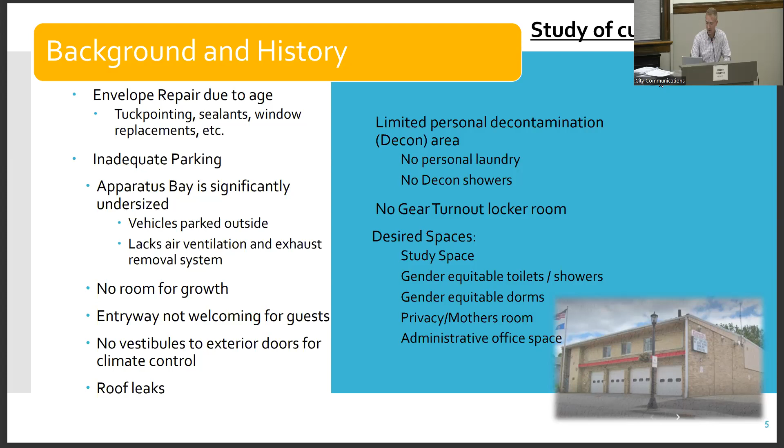We also identified that we'd like to see different spaces - if it would be optimal to have a study space, gender equitable toilets and showers, gender equitable dorms, privacy mother rooms, as well as administrative spaces. In that study, we also identified non-compliance with different codes, ADA compliance, as well as identifying that we do have asbestos.

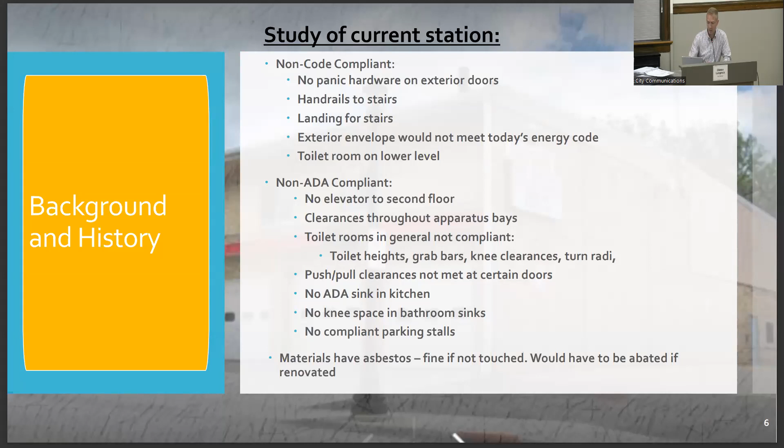In the places that it's at, it's fine if we don't touch it, but of course, if we do any renovations or maneuvering around it, then we have to have an abatement plan in place.

Overall, what we assessed on our 60-year-old station is that the positives are that it was in a good location compared to our fire district and where our responses and volunteers were. It has a meeting room, which is nice, as well as museum space. But the negatives came to light with safety, lacking modern safety features and space for best practice - apparatus floor is small, along with cleaning and decon, office space, turnout gear, public entrance and parking, as well as overnight accommodations.

Overall, the study led to a recommendation to begin assessing a possibly new facility. But as we talked about with the location, the study also showed us a mapping of where our volunteer responders are in relationship to the station.

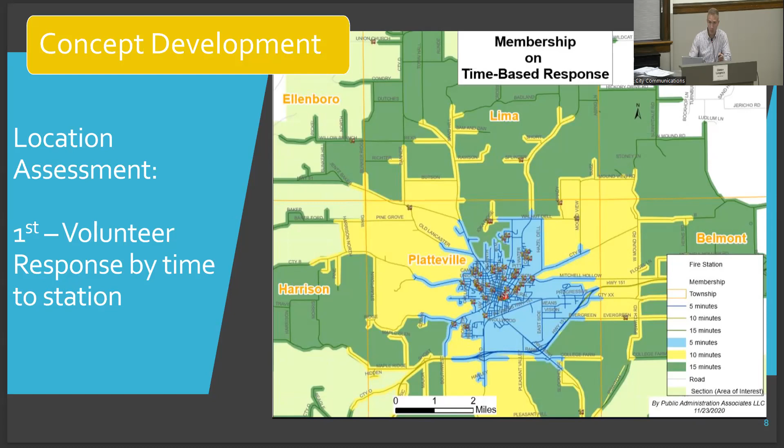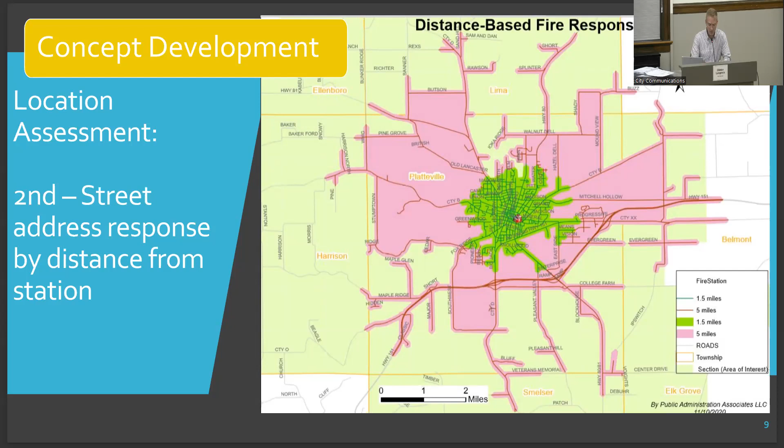Later into the project, we also started to ask the question, as we considered placement of the fire station, where are our responses at? A recent plot graph was put together through our partners, the Southwest Regional Planning Commission, who does our GIS work. The Chief sent them the addresses of our responses in 2022 to put on an overlay map.

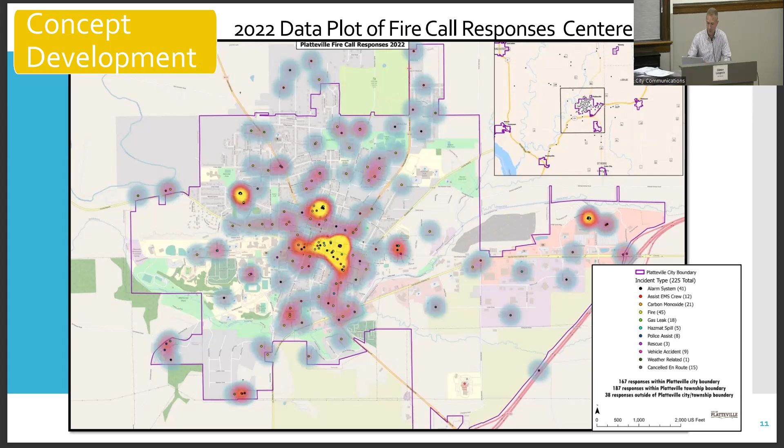With this data and the availability of space the city had at the time, we evaluated 3 main areas. We evaluated the existing site on East Main and quickly arrived at the conclusion that it's too small—the 6 bays needed for the current apparatus does not fit on the existing parcel.

We then looked at the Armory facility on Water Street, and again arrived at this being too small as well. It would need a 3-story solution, and has challenges with parking as well as stormwater that runs through that area, plus concerns with site safety and where responder parking would have to be in relation to the bays and other elements.

The space between Adams and Lewis Street, the O.E. Gray school site, was also evaluated, and this proved to be the most opportunity out of those 3 sites. It has room for growth, but was also identified as needing to account for some slope, as the contour runs downhill from the front side of Adams to the north side of Lewis.

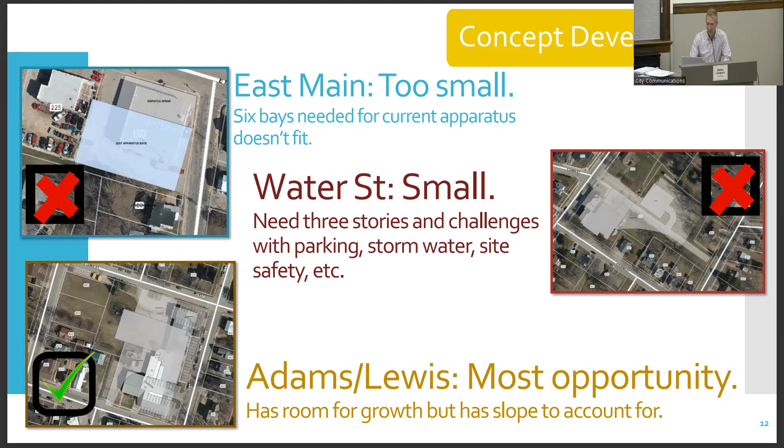With this assessment and data coming back, the city decided to move forward and begin design. We brought in Wendel Five Bugles to kick off the project and follow a timeline that roughly followed this, though it got extended a little bit. That timeline ended up pushing into around April-ish of 2023 in hitting these benchmarks.

While we were evaluating the different opportunities on the O.E. Gray, one of the first opportunities evaluated was a renovation of the existing school there. The concept was to reconfigure it, put a bay on it, and make it a fire station. Through that exercise, we realized the school is not meant to be an emergency response building. There was a lot of space, but not necessarily in the right spots. Using the existing hallway configurations also proved a challenge for operational purposes. The overall assessment was that it would require significant demolition and reconstruction, so essentially starting with an etch-a-sketch on OE Gray was seen as most preferable.

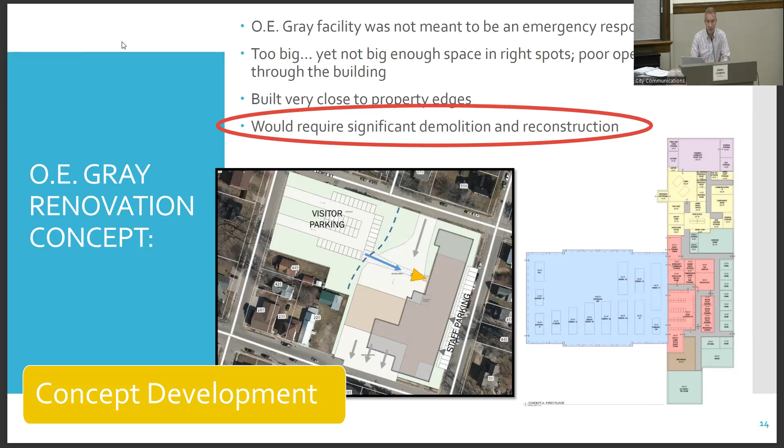Then a series of multiple different models were explored with a two-story design concept. They looked initially at trying to capture some of the topography, having a ground level entrance off of a basement floor, and a ground level entrance off of Adams Street, and looked at different places to position it on the parcel. Multiple models were explored in trying to arrive at a solution on OE Gray.

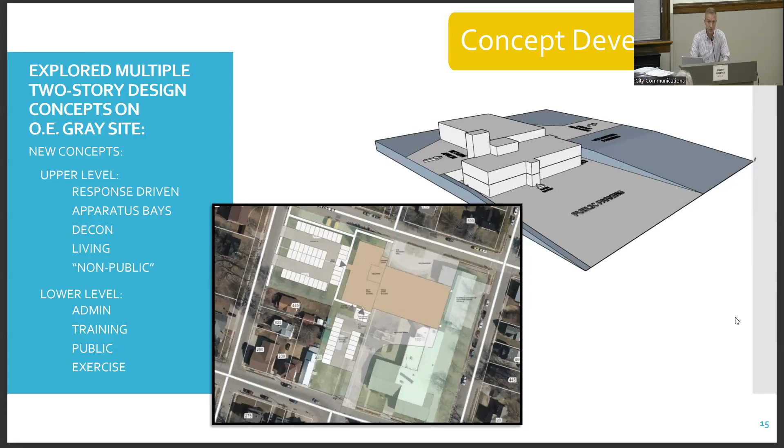At the same time, through the efforts of some amazing folks here at the city, with support from our state and federal legislators and all kinds of folks that helped us, as well as partners in town writing letters of support, we were given notification of an appropriation of federal congressionally directed funds of $7 million.

We also brought in a construction manager, arriving through a bid process through our RFP process, arriving at Kraemer Brothers. In bringing in the construction manager, we had a clearer vision of what some of the civil work was going to be in order to accomplish the project. So we had a clearer understanding of the engineering, as well as some of the material costs and inflation.

At this time, we also became aware of a property line discrepancy as we surveyed the plot. How that impacted things: if you're familiar with the driveway that goes into OE Gray, the fence on the west side is edged over and actually encroaches into the existing parcel, because the original alleyway is only on the east side of what is Highway 81 there. So we became aware of that small change in expectations, if you will.

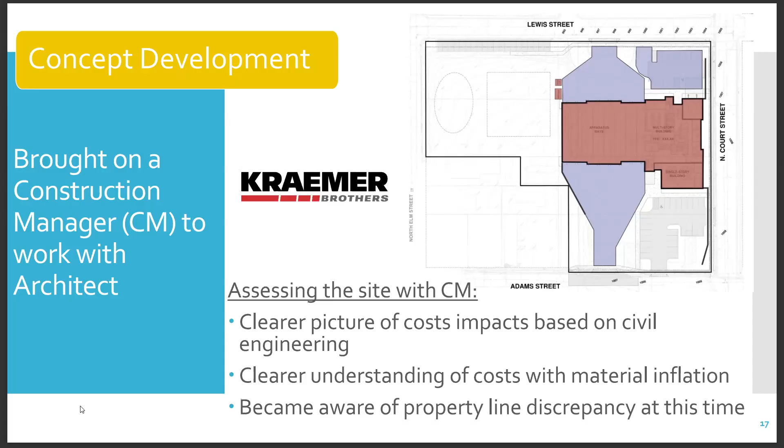As many of you were here on the evening of April 20th, we had our schematic design presentation, or concept design presentation, brought forward from Wendel/Five Bugles, and then also the Kraemer Brothers.

The solution fit on the build site. It offered 7 drive-through bays, decontamination, admin offices, a 60-person training room, storage, kitchen, EOC space, and future expansion for dormitories, essentially a second floor that was shelled. It came at a cost estimated at $15,475,000 based on square footage.

It also had several different features or alternate bids that could be included into it or reduced from it. Taking that design and talking with our folks here on the city end, we asked them to slim down that 2-story schematic to get to a price point down about $3 million, bringing it from $15.4 million down to $12.5 million. That was based on the assumption of knowing we had $7 million in appropriations.

That put an obligation on the city of borrowing approximately $3 million. It put our town's partners in an obligation of borrowing approximately $1 million. And that also left about $1.5 million that, in dealing with our fundraising partners, they felt they could potentially raise with local support.

But in our efforts of doing that, how this was all slimmed down was really based on square footage reductions to fit a price point. So all the different features and functions of those rooms—the gear room, the PPE lockers, watch room, et cetera—were all condensed down again to meet a price point. And there were concerns about how much functionality we'd be losing if we compressed those spaces that small.

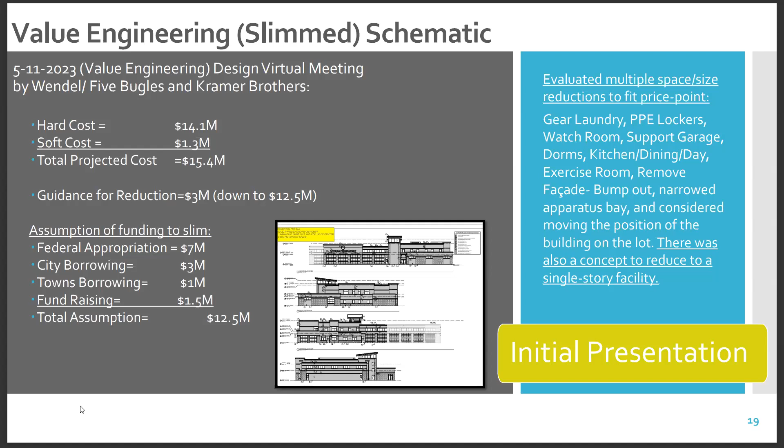At this time, it was also brought up: is there a way to reduce additional costs, to try to save some of those features and room sizes by bringing it down into 1 story? So not quite a backup and restart, but more of, okay, let's try to figure this out then. We arrived at working with our design team on bringing forward 4 main concepts for our different partners to evaluate.

The 4 main concepts are the two-story slim design, which we just addressed in broad strokes, a single-story design that fits on the parcel being OE Gray, a single-story design that fits with the acquisition of the adjacent blighted parcels next to it, like an expanded OE Gray, and then a concept of a single-story design that can be placed out in the industrial park. The thought there is that you'll get a bigger sandbox, with less restrictions and less civil work to engage in, so maybe we get more for our money. We also asked for the alternate of a basement space and a seventh apparatus bay to be featured as options for all four of those basic concept designs.

So in broad strokes, the first option is the two-story slim design that fits on the parcels. On a broad assessment of this parcel, you're looking at improvement of bay space compared to the existing facilities. It fits on the OE Gray site, with an egress onto Adams Street, east of the corner on Highway 81. It doesn't allow for future occupancy without added money, because this design and price point essentially has the second floor shelled and unfinished. So we don't have dormitories for overnight or long stays, or facilitating full-time responders. The multiple stories also include the need for an elevator and stairwell costs to be in compliance with a public building, and the spaces have been slimmed to meet a cost point.

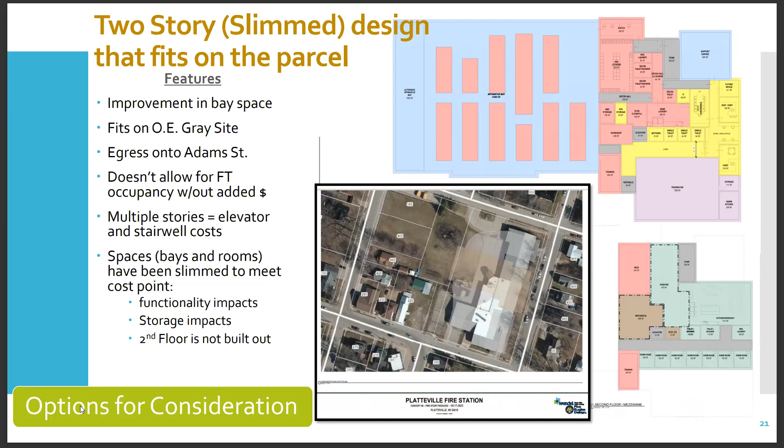So putting this in a realm to tee up for a matrix decision, the overall space of this design is 26.5 thousand square feet, reaching about 83.2% of the assessed need of 31,900 square feet that we had at the onset of this study. The response to this facility is optimal, as it's still located in the center of our volunteer response, in the center of where we're seeing most of our fire district responses. Egress is onto Adams Street. The growth opportunity is limited, but there's some opportunity for growth with consideration for the slopes and the initial placement on that parcel.

Overall, the pros are it fits on the parcel, it has improved circulation over the existing facility for movement throughout the building, and it has good separation between public and private space that allows for public parking and entry off of Adams Street. Multiple levels requiring an elevator and stairs is a con, because that's going to incur more costs. We have some lost storage space compared to our existing building, and the reduced rooms have potential for significant impacts on functions. The second floor, at this price point, is not built out.

So the cost, the base bid on this is $12,482,145. And again, this is 12 million. I'm sorry, 12 million, yes, 12 million - it's made out of more than cardboard. So yes, 12,482,145. To add the additional features, based on square footage, adding a seventh bay for functionality is 398,000 and change, and the added cost of putting a basement underneath it is about 2.6 million.

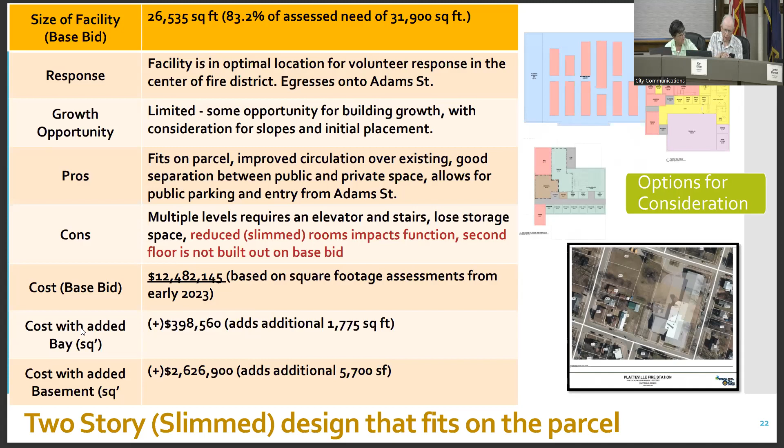I'm going back, you talked about a single floor. Those will come up shortly. Just a minute. The first option is two-story, here's a two-story. So that's what we're talking about. The first option is a two-story.

Or here it says single-story design that fits on the parcel. That's the second. We're now talking just about this one. So there are 4 concepts. We've just heard concept number 1, the two-story. Now we're going to go to concept number 2.

We're good. Okay, so the second one now is a single story design that fits on the parcel. Again, this fits on the OE parcel. Some of the features and broad... advance your slide, please. Oh yes, thank you, thank you.

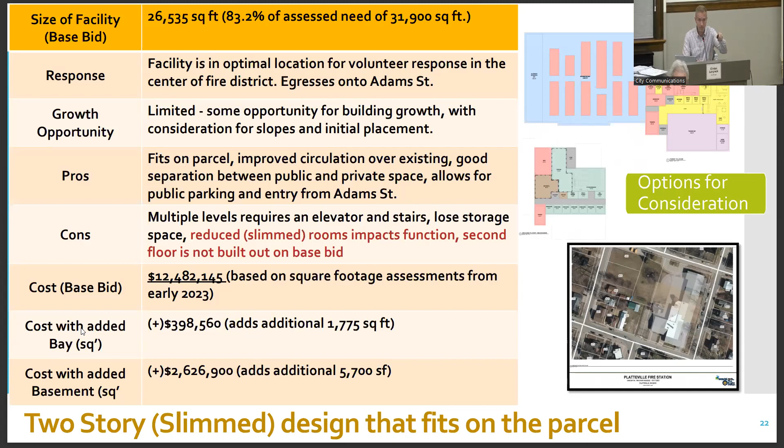Okay, there we go. Again, if this is a single story, there's also a basement option. That's an added feature that can be in addition to all 4 of these options tonight. You can put a basement under it. It costs about $2.6 million. So you're going down there, single story, 1, 2, 3. You could put a basement underneath, and so that's another floor. Essentially a basement would be an underground, lower level, extra floor. Correct.

It's not included in any of the base bids, it's an alternate on all of them. Okay? Let's do it. I just want to be clear what you're talking about.

Putting this on a matrix, this one's a little bit bigger now. You're at 29,164 square feet, which is getting you to approximately 91.4% of the assessed need. In response, the facility is again an optimal location for volunteer responses in the center of the fire district. Egress is onto Adams Street. Growth opportunity is limited. Growth may likely be an outbuilding or modification to responder parking with consideration for the slope.

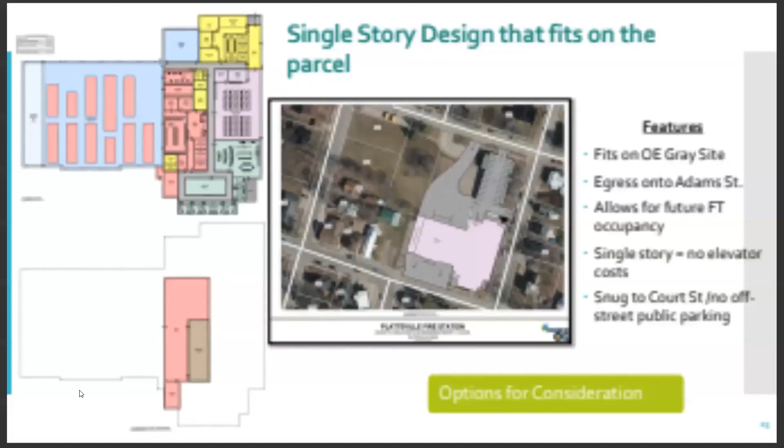I think it's probably important to point out too, so in order to try to reduce costs on civil engineering work, the building is brought up to the south side of this parcel where there is less slope. If we went back and tried to do different angled driveways, it would result in more retention walls and things of that nature. So in trying to reduce cost, it's edged up here in the front, the south side of the parcel. So the pro is it does fit on the parcel.

The admin is connected to the garage and the watch room, which is seen as a bonus. It does not require an elevator or added stairs in comparison to the previous option. The cons are the parking lot and entry is less than optimal. You're again not going to have off-street parking. The 7th apparatus bay may not fit as an option in this, because the parcel lines off the east with the adjacent properties are very, very snug.

Once civil engineering is actually done - not just dropping a concept picture on there, but actually surveying and scoping it all out - it may not fit that 7th bay. The cost of this one comes at $13,391,071. The added bay, again, is the same cost based on the square footage, as well as the basement.

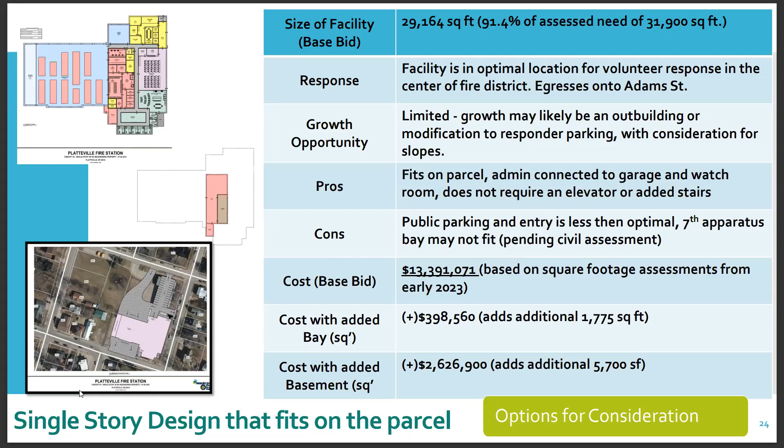You'll have more visibility of responders again coming out in trucks. It allows for future full-time occupancy because this price point is built with the dormitories built out. It is a single story, so in comparison to the double story one, there would be no elevator costs. It allows for off-street parking. As you can see, with it being snugged over, it does allow for some public street parking off of Court Street, and it has additional responder off-street parking as well.

Looking at this on a matrix, you're at a little less square footage than the last one, but you're still at 90.5% of the assessed need. The facility is optimally located for volunteer response in the center of the district and has optimal egress out on Highway 81 in comparison to the previous two.

The growth opportunity is limited. Growth may likely be an outbuilding or modification to a responder parking lot with consideration for slopes. The pros is you have safer egress and visibility onto Highway 81 in comparison to the previous two. Anticipated space for the 7th bay pending civil. There's room for off-street parking. Like the previous, the admin is connected to the watchroom and support garage. There's additional storage space, living quarters built out, and best operational flow in comparison to the previous one story.

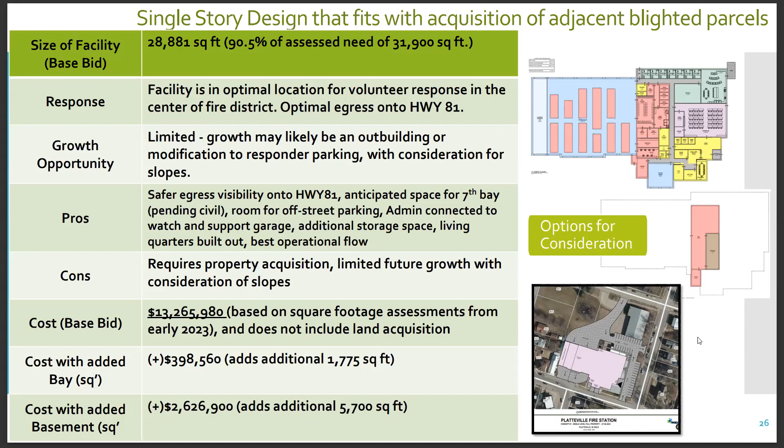Light green, it's kind of a faded color at the far left. That's the potential 7th bay, on the top schematic there. It's showing your apparatus bay with the fleet trucks in there, and it looks like the rectangle on the far left is the 7th bay added.

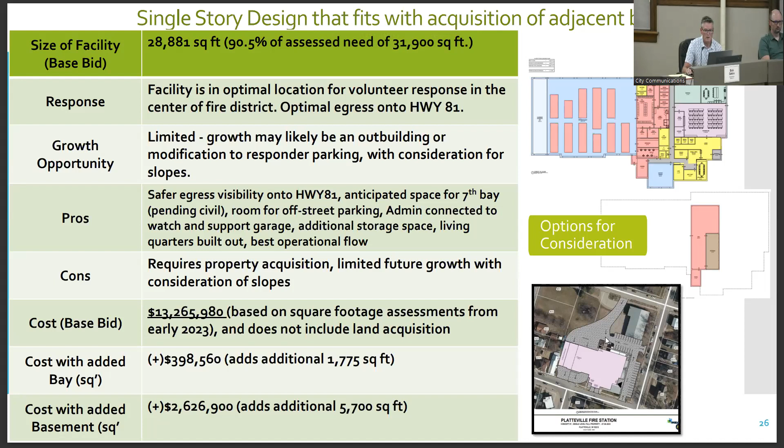That is correct. Question for Chief Simmons: how essential is the 7th bay? Because I know well, some of these might not be able to happen.

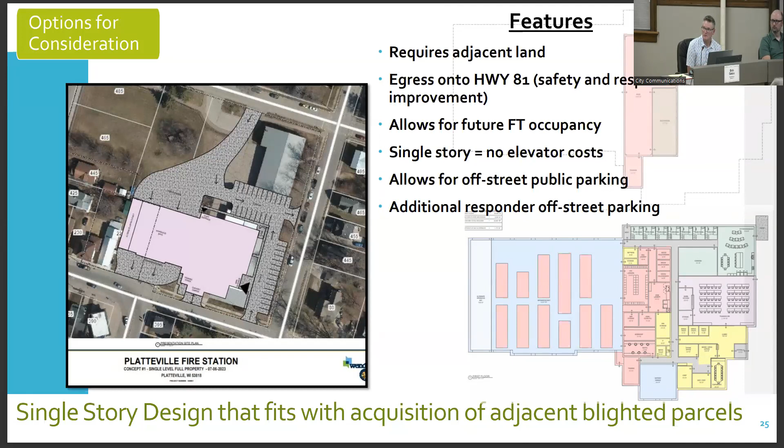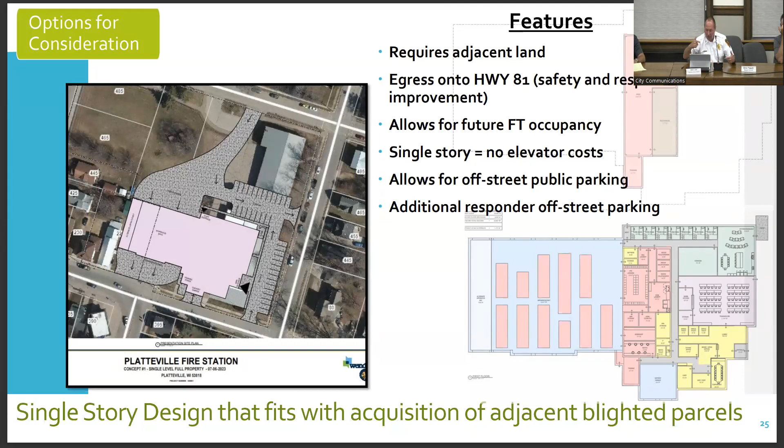Six bays is basically space for everything, our apparatus now, with more space in between them, not necessarily loaded by operational functionality, but again to organize them to fit into those spaces. The 7th bay allows either space where we can have apparatus if it's being serviced, because they are stacked. If we're working on one and we can't get the one out behind it, it becomes a problem. So it allows us to have a space to either be servicing on one or adjust the operational flow so that we don't have to still move an apparatus to get the one out behind it that we need. Just because they're pull-through doesn't necessarily mean that with 6 bays we can fully stack everything the way that it needs to operationally respond.

So the thing with it is it allows you for all that future expansion. And at $400,000, you'll never build that space for $400,000 again. That space becomes more and more expensive and maybe not possible in the future. Sounds pretty essential. Thanks.

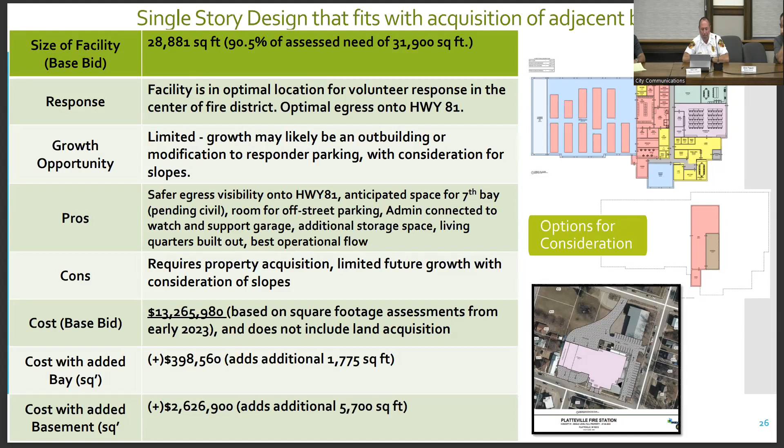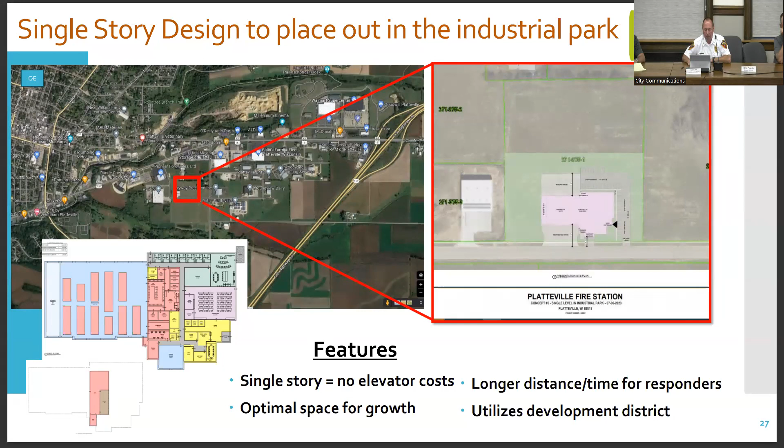Now moving into the 4th design, it's taking a single story, the same basic building design that we just looked at for an expanded OE gray, and it's placing it out in the industrial park off of Vision Drive. You'll see a little bit of a blow-up there of what it looks like. A lot of the same building features remain in place. The main difference, of course, is you retain the same type of thing, if it's a single story, so there's no elevator cost.

Out in the industrial park, though, you're going to have certainly more space to grow if the building has to grow east, north, south, and depending on how far from the road it is, to the south, you're going to have optimal space. The downside, most obviously, becomes the longer distance and time for responders, both volunteers coming to the facility and, following the data that we have, responding back out to reports or to calls. Another downside of consideration is that it will utilize the development district. We are trying to promote growth out there, and that is less taxable space that is out there.

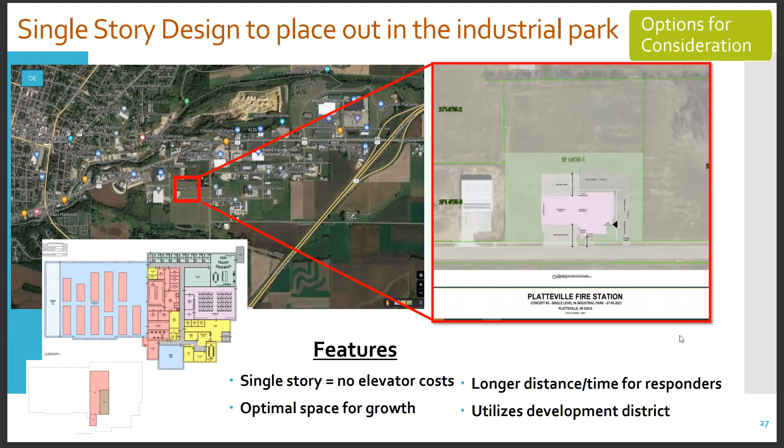This is kind of the breakdown. You're looking at the same building size, so you're meeting 90.5%. As we talked about, the response time adds to about 70% of our population, it would increase the response time. However, you're going to have optimal room for growth. Pros is you're going to have availability for expansion.

The parcel will need less civil work, including there will not be a need for demolition on OE Gray. It has the same features of connecting the watch room to the support garage as well as additional storage.

The cons is, as we talked about, the time for response. It does take space from economic development, and it could have potential impacts on the ISO rating as well as FEMA grants. But the overall cost is coming in significantly lower with the idea of less civil work.

$19,592,475. 12 million. What did I say? 19. How did I get 19 out of that? It's a good thing you guys are here. 19,592,475. Did you just say 19? Did I say it again? You did. 12.5. It'll come in at a little over 12.5. You don't like that option. I think you need some water or something. Oh, sorry, too many numbers today.

12.6. Okay. And yes, in talking about the placement too, we've had conversations with chiefs. We've talked with two different chiefs that gave anecdotal situations of towns that built in their industrial park expecting growth to go out there, and then found out that in fact the city grew the other way, and they're responding out further from city center to a site and coming back.

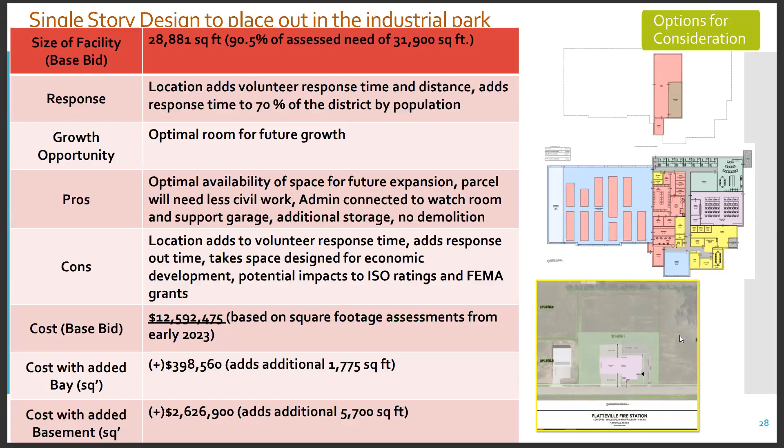Moving past our four major features, we talk about the alternate bids, and what we'd be gaining from them: a basement space, room for future expansion opportunities and storage, future partnership opportunities, and potential for shelter space in the realm of disasters and such.

With the 7th bay added, as Chief mentioned, it's space for future apparatus needs. It allows for more flexibility in apparatus layouts, and that's in regards to responses. I don't know if Chief wants to expand on having the different abilities to put different pieces in different places.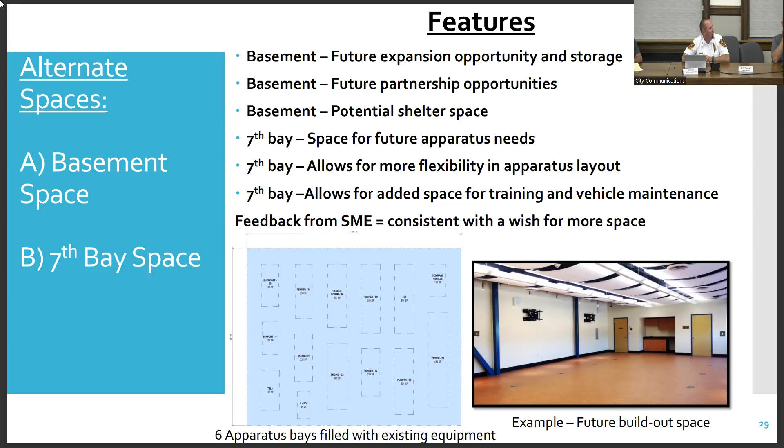Well, with us covering both city and rural areas, we have to use different types of apparatus. Rurally, they don't have hydrants to supply a water source, so we use tenders and take the water with us. There's also other specialty equipment, like UTVs and brush trucks, for off-road type fires and stuff like that. So not everything goes to every type of incident we have.

As it is now, we have to move vehicles to get to another vehicle we need to use, because vehicles are basically placed in the current station by how they fit, not by how they should functionally respond. So that's our concern with six bays, is we've taken our problem and just spread it out, putting more space between the trucks, without actually addressing that issue.

The blue graphic there shows the six bay space with the entire fleet in there, and it does fit. And part of it is, in all fairness, two of the smaller vehicles could fit in the support garage. So there's two small vehicles—the tinier rectangles could be taken out of that square to get a true assessment of what it would look like.

Overall, with the need for more basement space, again, future partnerships—we have more and more pressure from state and budget cuts to try to consolidate operations, which would potentially provide future partnerships with county or state level types of support, and have build-out space.

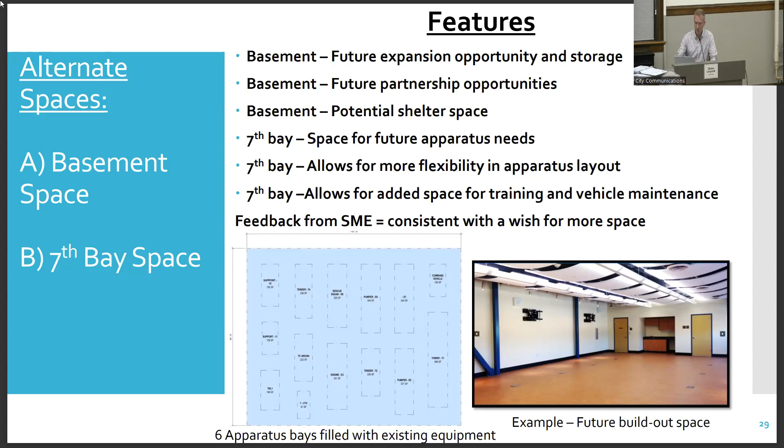So we took these concepts to a couple different fire chiefs who had recently gone through a build, or were considering one, and asked them to give some feedback. A lot of the consistent feedback arrived at these talking points: it's maybe not a matter of if you're going to need 24/7 staffing, but probably a matter of when you're going to need it, and whether that happens in a 5-year, 10-year, or 30-year window is yet to be seen. Very, very fortunate for the responders that we have right now.

Building flow, it's recommended that you build the facility with the understanding that your responders, for voluntary purposes, are trying to get to their locker as soon as they can at the shortest possible distance. Also, if you can afford an extra bay, try to do it now. It allows for more training and maintenance. If you can't get enough storage space, it fills up fast.

They also recommended, on a more technical level, when you do have storage space, visualize and plan what that shelving is going to look like and how it's going to operate. The current designs all call for an in-floor heating system, and they recommended dual doors to keep that in place, because opening up both doors, all the hot air blows out, and then trying to reheat that space with just forced air becomes a problem. So if you can have the cement underneath it warm, it helps heat it quicker.

They recommended if you're on the OE Gray site, it would be more optimal to egress onto Highway 181, which would be safer than Adams. They again said: location, follow the responder data, and then safety. Consider truck egress in relationship to your responder parking was another point we talked about at length.

So the difference is, right now in our existing building in storage rooms, we have roughly 1,024 square feet of storage. In the first option, the slimmed two-story option, as it sits with what's proposed there, has 927 square foot of storage, so we actually lose storage space. The other two single-story options have roughly 3,000 square foot of storage space, so they're an increase of 3 times what we currently have.

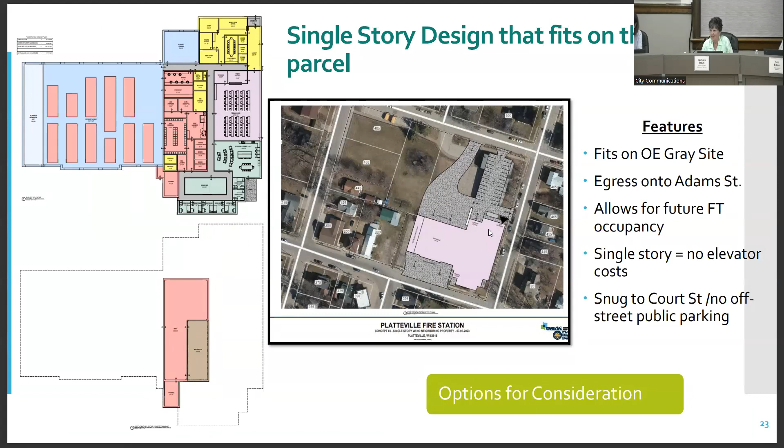Okay folks, well that is the fire facility concepts. You heard the plan, the timeline. Clint and Ryan will be meeting with our partners. The last page showed as the price increases for us, it increases for others, so that's also a consideration they will be talking about since we all have a stake in this.

Okay, that's it for tonight. So unless somebody has something else, I think we could take a motion for adjournment and you can all return to the heat of the outside. It's been very nice in here, and we certainly hope that Todd is doing well tonight. He got called into work because the air conditioner at the place that he worked went down. Not a good thing to have happen tonight.